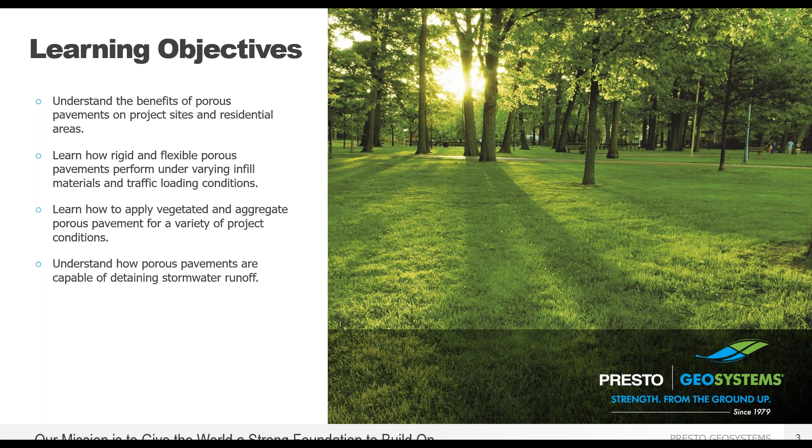First, a little background on Presto. We worked with the U.S. Army Corps of Engineers to develop geocell technology in the late 1970s and have been innovating ever since. Our products have been used in over 100 countries and in every state of the United States. But we go beyond simply providing a product to helping you provide a complete solution.

We operate in 3 product areas: soil stabilization using our GeoWeb geocells, which can be used for load support, slope and channel protection, and constructing green retaining walls; porous pavements, of which we have both vegetated and aggregate solutions; and lightweight reusable construction mats.

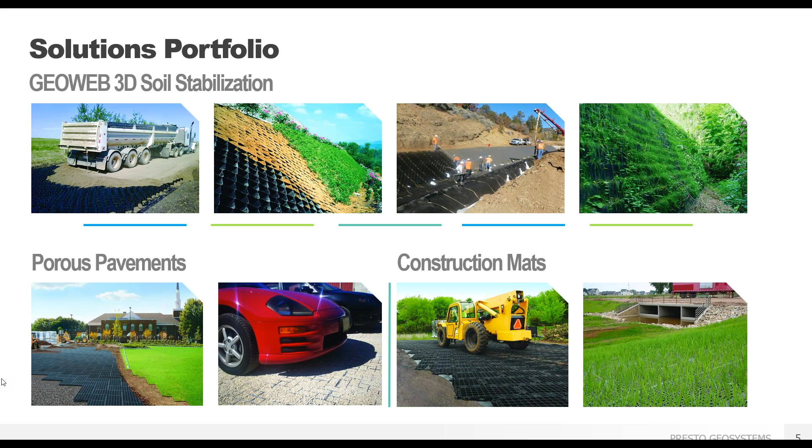Now on to our focus topic of porous pavement. A natural first question might be, why are porous pavements needed? Or how are they different than standard pavement surfaces we usually see? There are a number of great benefits to using a porous pavement for your project.

Porous pavements are a class of solutions that address, in a cost-effective way, regulations that need to be met. After more than 50 years, the Clean Water Act continues to create the need for stormwater management for both quantity and quality, as the primary federal law in the United States governing water pollution. While the Clean Water Act establishes the basic structure for regulating discharges of pollutants into the waters of the U.S. and regulating quality standards for surface waters, most states have developed non-point pollution regulations with specific targets, and some local regulations often require even more stringent standards if the project is near a protected wetland or water source.

The EU Water Framework Directive establishes protection on inland surface waters, transitional waters, coastal waters, and groundwater, and it aims to prevent and reduce pollution, promote sustainable water use, protect and improve the aquatic environment, and mitigate the effects of floods and droughts. The Canada Water Act, German Federal Water Act, Water Prevention and Control of Pollution Act in India, and similar structures throughout other countries parallel these legal frameworks. Porous pavements are one way to meet these criteria while still performing in a structurally meaningful and long-lasting way.

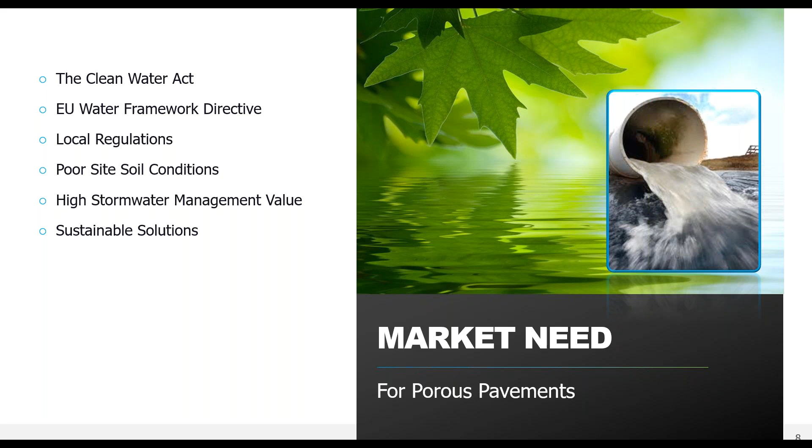So there are a couple of different porous pavement options available. We'll start by talking about some of the more traditional options. These are probably better known. The options for porous pavements include using a porous version of the traditional pavements, like concrete, asphalt, and paver blocks. These applications allow for normal traffic frequency use and have increased infiltration over their non-porous versions, which can help with stormwater requirements.

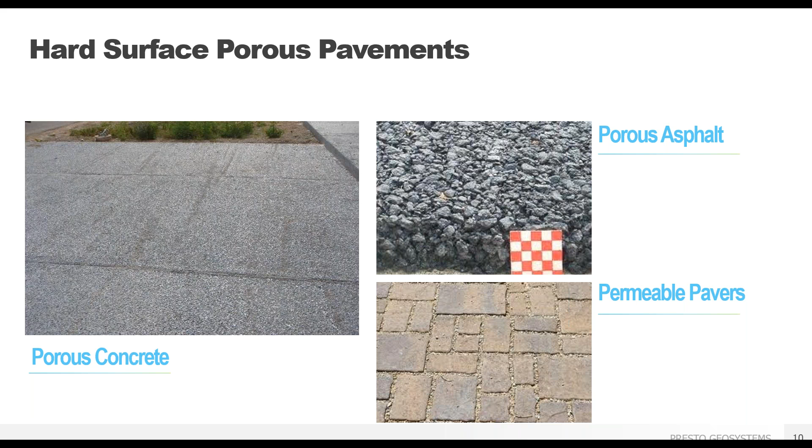Hard surface porous pavements act very similarly to their non-porous counterparts, but often suffer from durability challenges long term. The big difference between standard pavement and hard surface porous pavement is in the cross section.

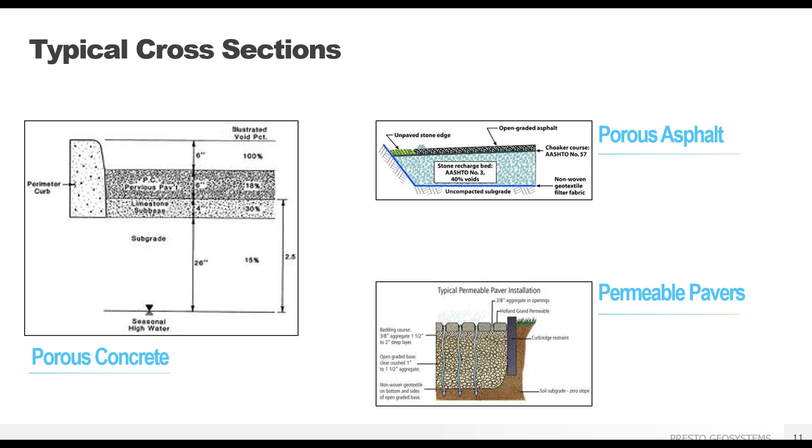All three of these methods have deeper cross sections than a standard pavement section and require a choker or bedding course between the pavement and the open graded base layer. The choker layer is intended to be both the leveling layer for the surface pavement, ensuring a smooth and proper surface, and it's intended to provide the resistance to movement or differential settlement that could damage the surface. So it has an important function, but can be costly and time-consuming to install properly.

I also have mentioned some durability challenges, as well as a few other significant drawbacks to using these traditional methods. Cost is one of the biggest factors, both during installation and over the lifetime of the project. During construction, these products need specialized materials to create the pavement and specially trained contractors that know how to properly install this type of system.

There's a lot of long-term maintenance requirements as well. Regular deep cleaning, such as vacuuming and power washing, is required to reduce clogged areas, which happens often in high traffic areas. Resurfacing or replacement of lost material due to raveling, which occurs because of weak bonds between materials, is also common.

And that choker course we just talked about, it actually impedes water flow, reducing the infiltration capacity of the system and leading to ponding at the surface. Kind of the opposite effect of what we're going for, right?

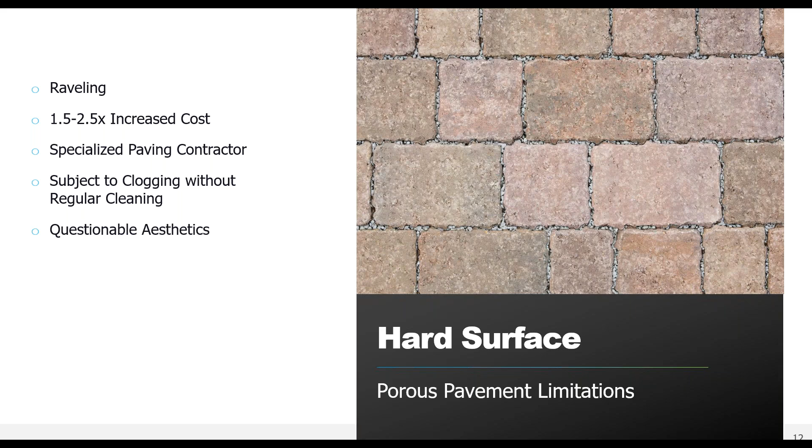So we want to find a way to fix those issues for a better way forward. Here at Presto Geosystems, we offer two different types of porous pavement systems, a flexible and a rigid option to best fit your needs. Instead of adaptations of existing pavements, our solutions are designed from the ground up to function as a porous pavement.

So we're going to start off with our rigid porous pavement systems.

There are two different surface types that can be used for our porous pavement systems: topsoil with vegetation or gravel for a stone surface. The rigid porous pavement systems work well with both options, and it's up to you to decide what you need for your site.

The biggest difference between the two, besides looks obviously, is the amount of vehicle traffic they're able to withstand. With a vegetated system, vehicle traffic should be occasional. Think only a few times a week. This is because no matter how great a system is, grass just doesn't like to be driven on. Too much time getting crushed under cars will kill your grass. The system will still protect the root zone without any issues, but you won't have the nice green lawn you might have been hoping for, as the vegetation cannot reestablish between the traffic cycles.

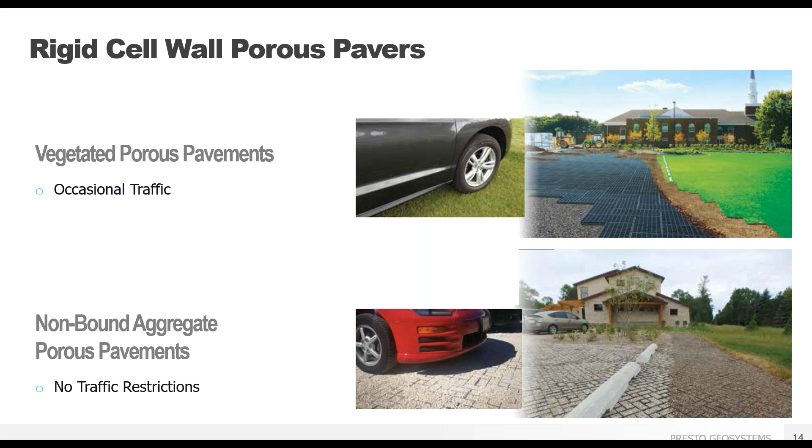There are two different paver units available depending on the infill type chosen. The first is for a vegetated system, and we call it geoblock. The geoblock system is a rigid porous paver unit, meaning that the panels are not meant to bend or twist. This rigid nature means that a thinner cross-section is possible and is a stronger system compared to systems that are made of textiles or of traditional pavement materials like concrete.

An important aspect of the geoblock units is the large amount of open space in the bottom of each cell, which allows for full root penetration so the grass surface is thick and uniform. The cells are filled with topsoil and then vegetated, so grass grows above the cell walls. So you don't see any plastic material, and the paver unit itself is protecting the root zone.

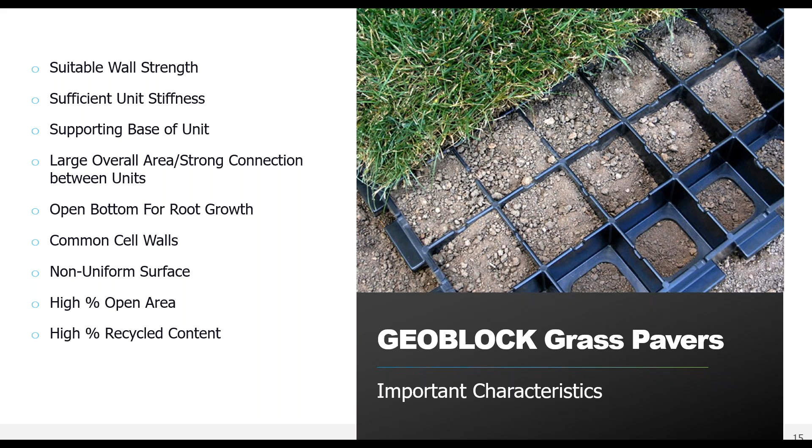We call the aggregate system GeoPave, which I know may cause confusion with the vegetated geoblock name, so I'll try to help you keep track. The GeoPave units are similar to the geoblock units with the same rigid paver characteristics, but have specific features needed for performance with aggregate infill.

The main difference to highlight is the monolithic mesh bottom. This is a molded in place mesh on the underside of the paver unit rather than the large openings we just saw. The mesh keeps the stone infill from migrating under the unit, and the integrated nature assists in the overall rigidity of the paver unit. This lattice bottom spreads the load similar to a snowshoe, so the wheel loads do not create ruts due to high volume of vehicles. These units were designed specifically to work with different types of infill material and create the best possible pavement section for your needs.

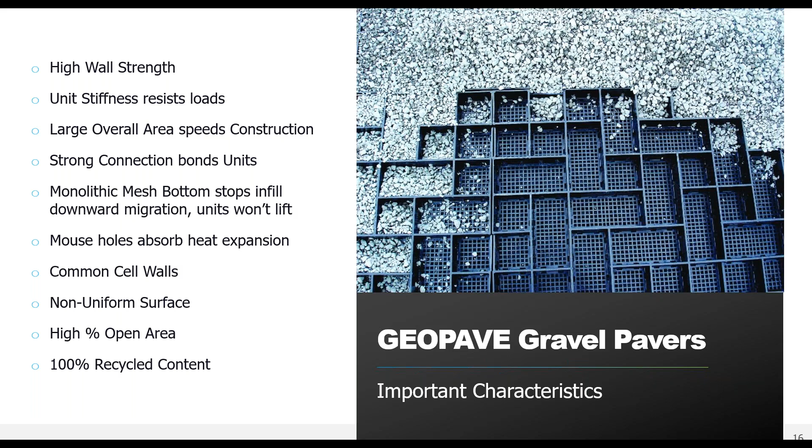We also offer a flexible porous pavement system called GeoWeb. This is a geocell, which may be a term you've heard before. Flexible porous pavement can support the same loads as the rigid paver products, but often requires a deeper cross-section to carry heavy vehicles. The flexible nature of the GeoWeb system is beneficial for areas with potential for settlement, such as wetland areas.

The GeoWeb system is similar to the rigid systems we just looked at in that it holds and confines your material in place to create a drivable surface. The difference is that with rigid systems, you're driving directly on the paver units, while with the flexible system, you're driving on the infill material.

So it's much more important to choose a high quality material when implementing a flexible system. You obviously aren't going to get ruts from the rigid paver units, but you also won't get them from the flexible system either. The GeoWeb panels create a platform for vehicles to drive on, and by holding the material in place, ruts and wheel wells won't form.

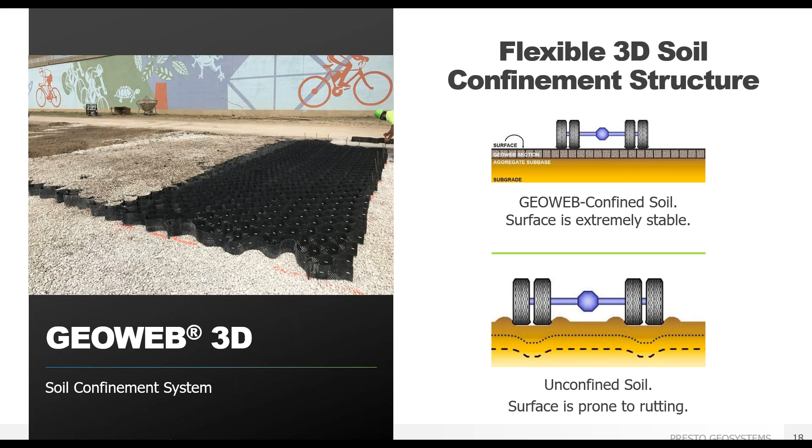The GeoWeb system is our version of GeoCell technology and consists of two main attributes. The first is the cell or container size, and the cells come in three diameters: small, medium, large, with various cell heights. These dimensions depend on your project details and vehicle loading requirements, and we can help you determine which is most appropriate for your specific job.

There are also 5 different section lengths to best fit your project needs. The ultrasonically welded seam, where all the connecting points are, is important to the function of a geocell, and the stronger your seam strength, the better the performance of the geocell will be. These strong seams allow for heavier infill material, steeper or taller slopes if needed, and better lifetime performance.

GeoWeb is produced using high-quality virgin high-density polyethylene resin for consistently strong welds, while also maintaining semi-rigid ductile properties, high stress crack resistance, and overall toughness and long-term durability in the environment.

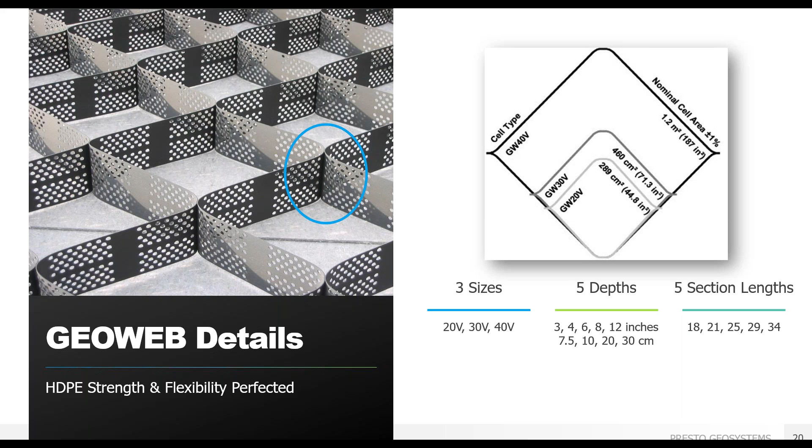The second main attribute of the GeoWeb system is the infill, or what you put into the container. The flexible GeoWeb system offers the choice between a vegetated surface and a stone surface. You can also have concrete as your infill material, but then you have an impervious surface, and that's not why we're here today. If you're curious about this choice, feel free to reach out to us and we'll be happy to help.

An important benefit of the system is that even a low quality aggregate, sand, or certain salvage material can be used to infill the cells. Using that salvaged aggregate or sand can save significant amounts of money on material and hauling costs.

We can also eliminate fines when desired, since the cells provide the confinement and aid compaction of cohesionless soils. So without the fines, you can significantly improve drainage and let water flow freely through the system, preventing pore pressure buildup and global failure of your cross section. This can also be considered a truly porous pavement.

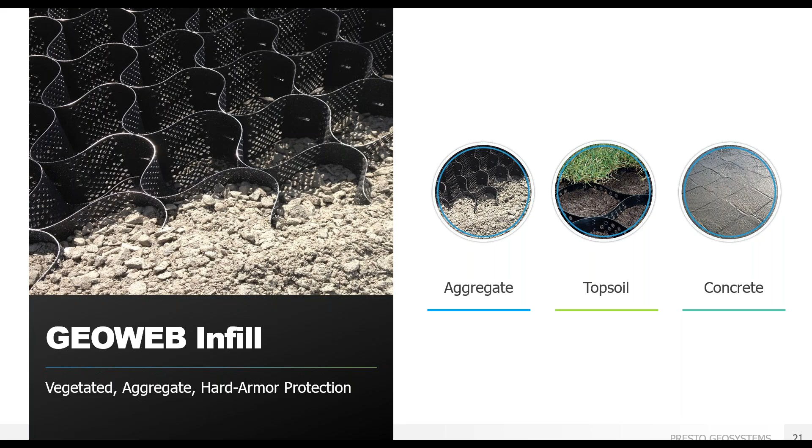So the three primary elements of any geocell system, cell walls, internal junctions, and connectors, must perform uniformly as a complete system.

GeoWeb is manufactured using a proprietary blend and will retain its durability for greater than 100 years, with lab testing indicating 149 years without degradation, even at full exposure to the elements. We stand behind these numbers so you can deliver certainty in the solution and build with quality materials you can trust.

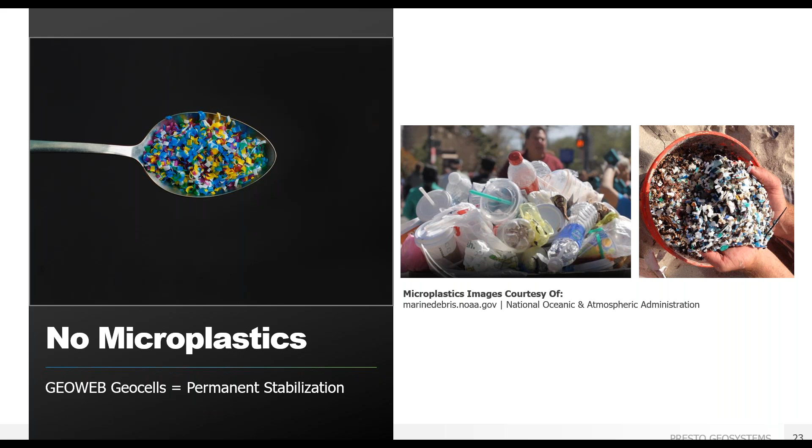GeoWeb is made from high stability inert materials and is your permanent stabilization solution. It will not degrade, leach, or release microplastics into the environment. GeoWeb is manufactured with premium high-density polyethylene resin with no fillers, polymer alloys, or compatibilizers. And our base resin is the same material used in environmental applications like geomembranes and other environmental barriers to protect against the spread of harmful toxins.

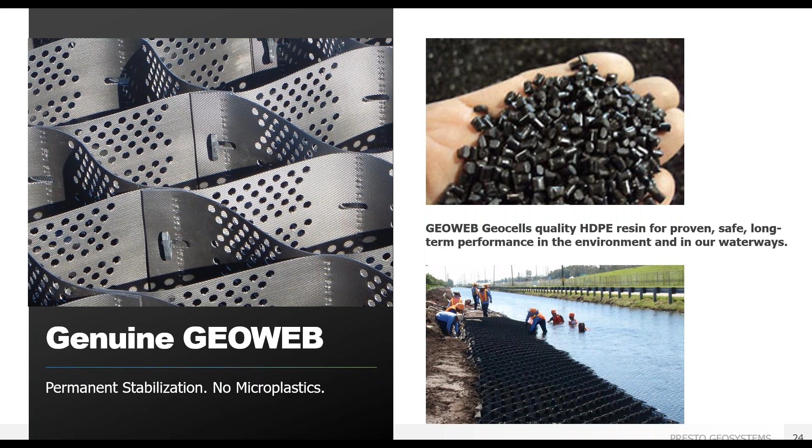Our products have been third-party tested by accredited geosynthetics labs, confirming long-term stability against environmental factors such as weathering and oxidation. GeoWeb and our accessories are 100% made in the USA under strict quality assurance and environmental control processes.

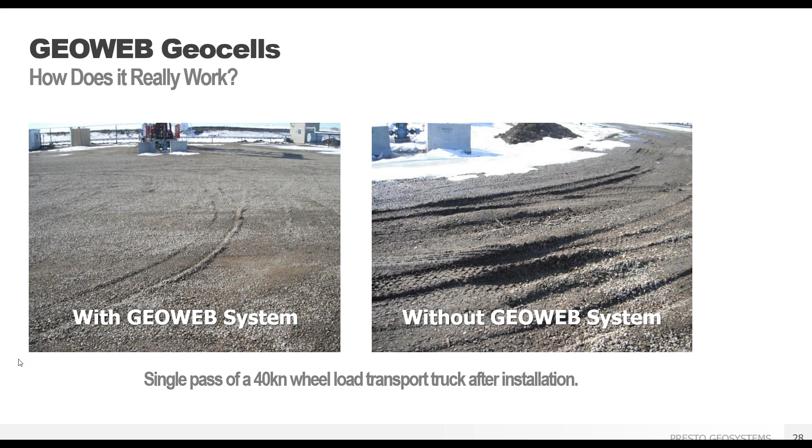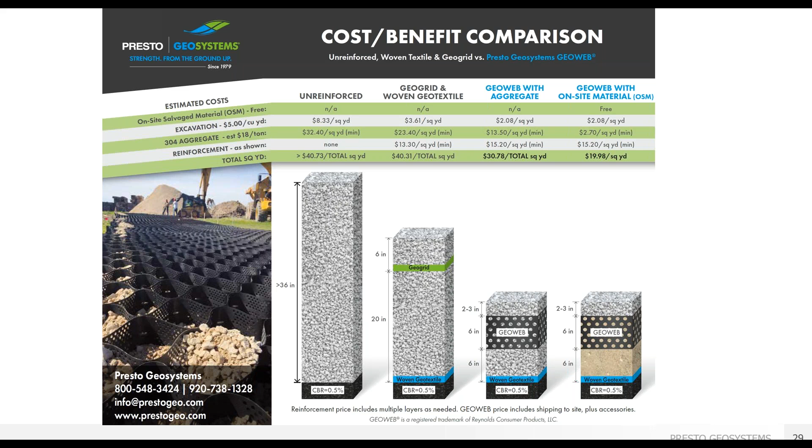So we've talked about the characteristics that make rigid and flexible porous pavement units special. With these in mind, we can now talk about the benefits of choosing porous pavements over hard surface pavements.

All of the products offer significant storage of stormwater in the cross-section as it moves into the groundwater system. Because the water infiltrates through the system, there is minimal sheet runoff at the surface, reducing flooding potential on or around the pavement.

The vegetated surface pavements, like the GeoBlock system, help keep the topsoil loose and protected from compaction, allowing water to infiltrate faster than any typical vegetated area on site.

Other paver systems that are geotextile fabric based percolate much more slowly and usually leave water ponding at the surface, which defeats the purpose of a porous pavement.

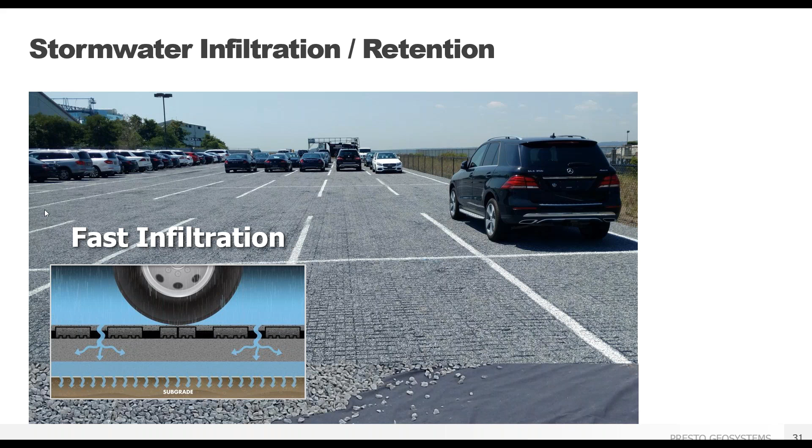Pavements that allow water to flow through the surface into a base of open-graded base course can reduce the requirements for stormwater storage at the surface. The rate of infiltration of both the porous pavement material and the subgrade soils, along with the porosity of the base material used, determines how much surface storage is required.

It's possible to reduce or even eliminate the need for above-ground storage if you can store that stormwater underground.

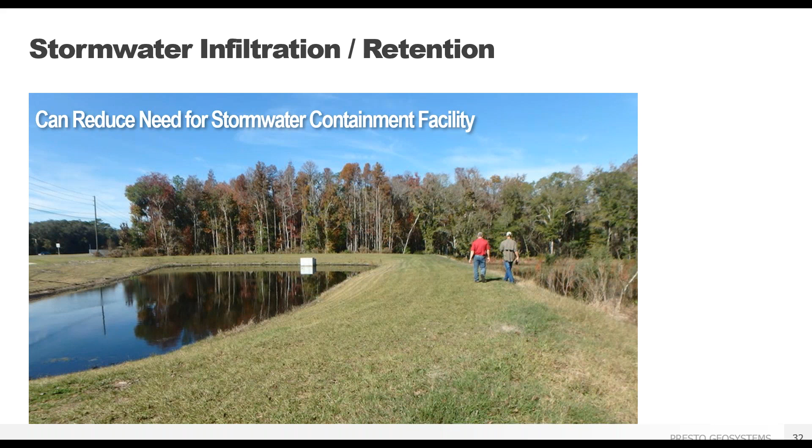If your native subgrade has poor infiltration, or if you're required to direct the water to a central location, collection pipes can be installed in the open-graded or engineered fill base course.

The pipes can have perforations to collect water and can be sloped to maintain velocity without affecting the surface grade. Providing a wrapped perforated pipe is typically not recommended unless the base is clean. It may be better to provide a geotextile filter around the perimeter of a drainage trench with the pipe encapsulated with stone.

The main thought is to prevent clogging, and the method used on a specific design will be based on base material and your anticipated use.

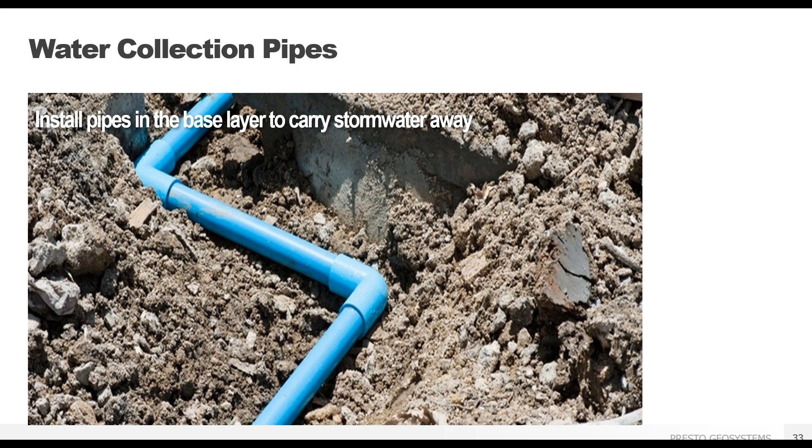Our vegetated GeoBlock and aggregate GeoPave pavers have a high crush strength because of their rigid and shared wall connections.

Pavers with enough strength allow for less base requirements to support loads, reducing the potential cross sections by up to 67%. The surface of the porous pavement resists concentrated rutting as the load is dispersed across the rigid pavement, so no wheel ruts or sunken drive lanes are going to form and cause failure points.

The units are strong enough to drive on unfilled, which makes installation both faster and easier. If a thinner cross section is important, these products would be the way to go.

Fabric-based systems obviously have no internal strength and easily warp under vehicle loading.

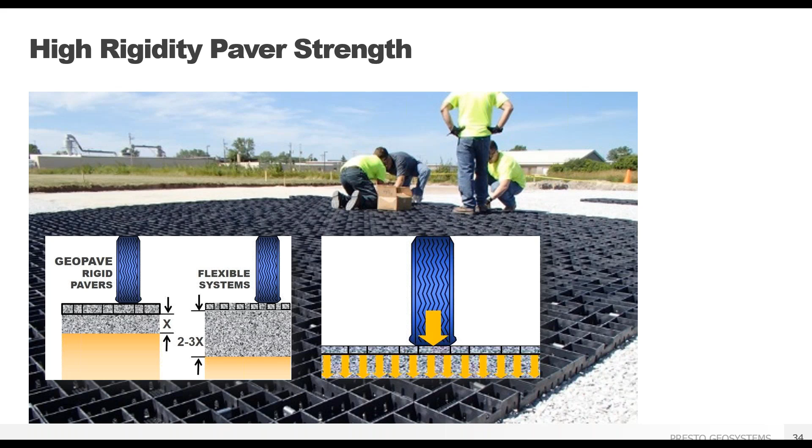One of the functions of a porous pavement system is to reduce the stress that's transferred to the soil by vehicle traffic. So a great application of these products is to use them as tree root protection, like this hotel did in southern Illinois. By laying these systems over buried tree roots as close to the tree trunks as possible, you reduce the stress that puts pressure on those roots, potentially damaging them and killing the tree.

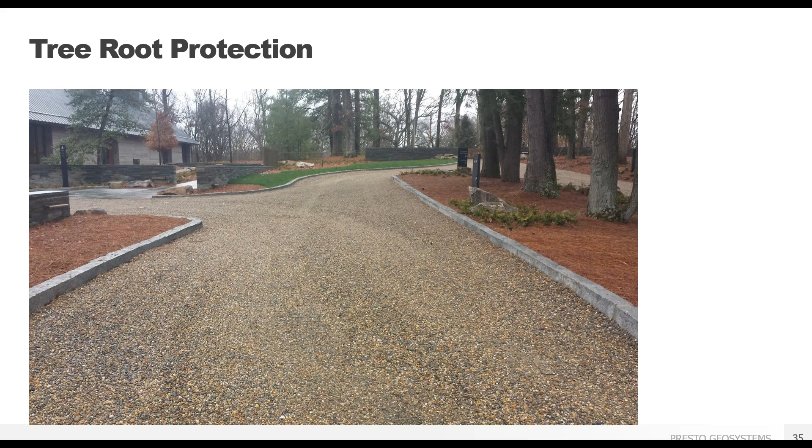The shared wall system and strong connections create a framework that's highly resistant to movement or breakage from vehicle turning stresses and torsional loads. So the rigid GeoPave and GeoBlock systems are not just straight drive lanes, they are full service vehicle areas, allowing for starting, stopping, turning, and everything in between. The panels are not going to be damaged from any normal vehicle activities, even from the heaviest trucks or semis.

The flexible GeoWeb system holds the infill material in place so that twisting movements from tires won't displace the material, and everything stays where it's supposed to.

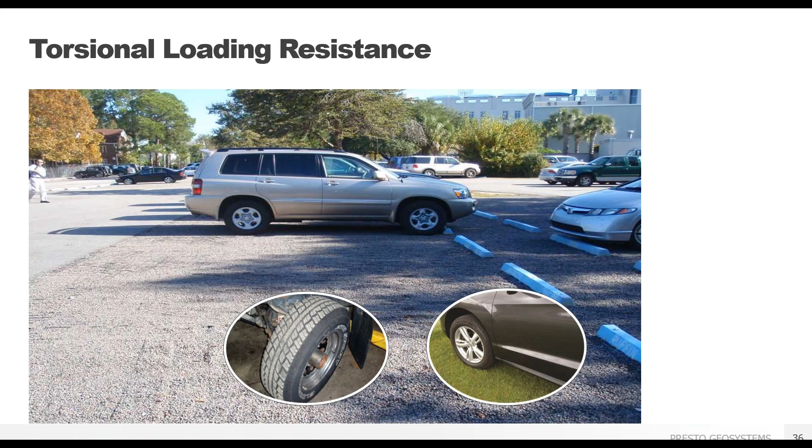Aggregate GeoPave and vegetated GeoBlock units, or the flexible GeoWeb panels working in concert with hard surface pavement, are so porous that they can handle sheet runoff from adjacent impervious parking areas. This is a great way to add additional parking spaces while still meeting stormwater requirements on site, with no need to create more stormwater infrastructure such as drainage, swales, or ponds.

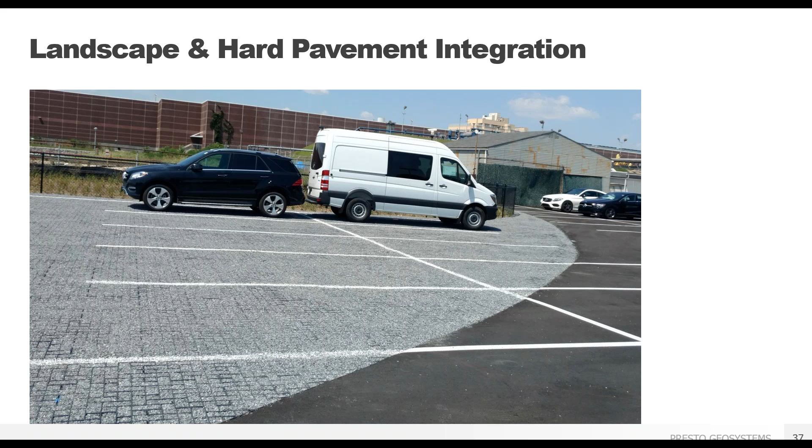The cell walls of the GeoPave unit are meant to be visible and were designed with a herringbone pattern similar to a paver stone aesthetic. Additionally, the infill stone color can be varied to create the sense of separation useful for walkways, parking lots, or road shoulders. The GeoBlock units allow for full vegetation growth with a more natural look, so the cell walls are not visible through the grass.

GeoWeb panels are completely covered so that no plastic material is seen, just your infill material. So whatever look you're going for on your site, you can achieve with these products without the unfinished look common to porous concrete or porous asphalt.

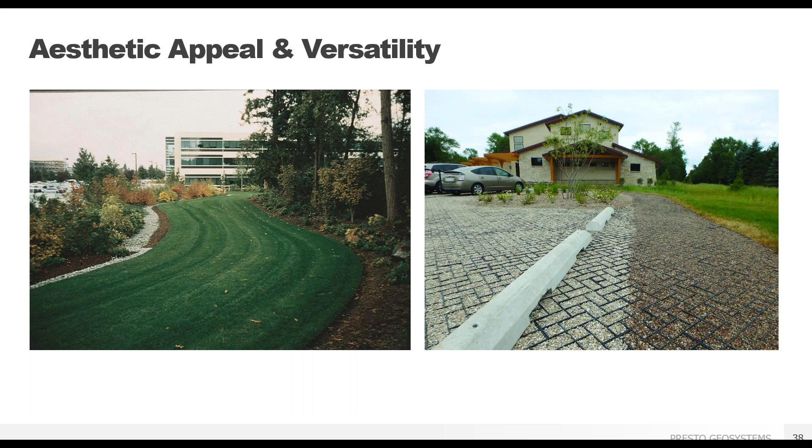Reducing a site's overall environmental impact can help meet green infrastructure, low impact development, or green building goals for building in protected or densely populated areas. It can also help you meet stormwater requirements that limit the amount of hard surface in your landscape plans, which is becoming an increasingly common requirement from cities and townships. This is something we experience all across the US and are absolutely willing to help you achieve for your specific projects.

Paving crews and specialized paving equipment are not necessary, and oftentimes landscape crews are all that's required. So you can save on equipment and labor costs and get these systems in the ground quickly without waiting for cure times or sequence construction limits.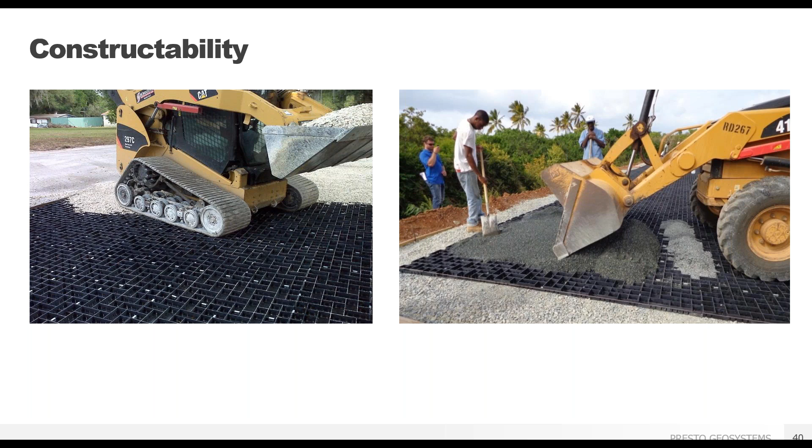All of our porous pavement systems are low maintenance, no need for vacuuming or unclogging, and no need to constantly be replacing the stone surface. By having the paver units or GeoWeb panels locked together and using basic anchoring methods, you can just place it and forget it.

Customizing your system also helps with maintenance when you keep people driving where they're supposed to be driving. Bright yellow and blue delineators are available for parking lanes or other marking, so you can make the space work for your needs. Other common extras such as parking stops are also easy to install in any of our porous pavement systems, like this porous parking lot in Nashville, Tennessee.

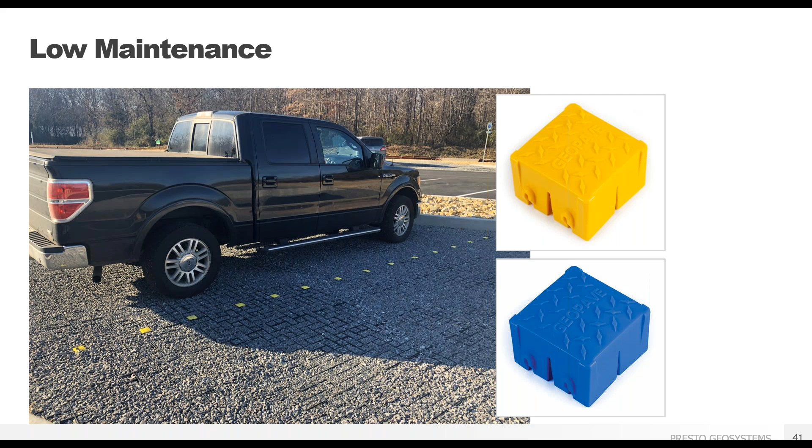All three options, both rigid and flexible, are capable of supporting very heavy vehicle loads, including emergency access vehicles like fully loaded fire trucks. So they work well as emergency access lanes, like at Newman University in Wichita, Kansas. The center median between existing sidewalks was reinforced with the GeoBlock vegetated system to be able to allow vehicle access as needed and otherwise look like a regular lawn people can walk on. Being able to use these systems even in these critical areas that need extra reinforcement really shows how useful porous pavement systems can be.

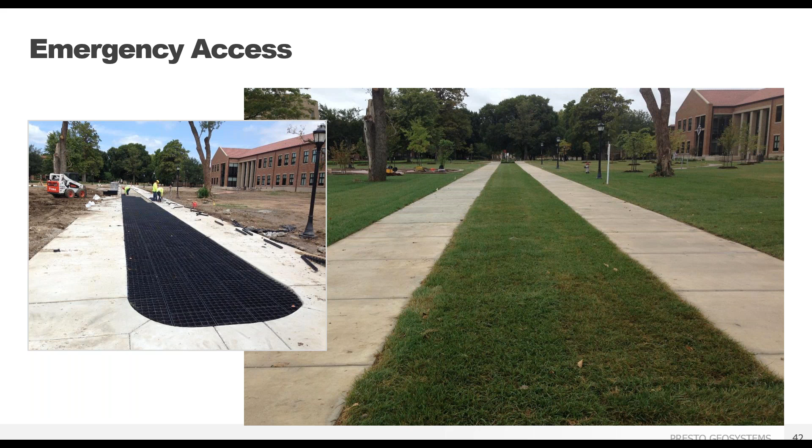Presto Geosystems has created a free, easy-to-use tool to determine the right porous pavement system for your specific project and site conditions. A cross-section of the system is created based on the inputs and system requirements. And there's a way to determine exactly how deep the base course needs to be for a certain amount of stormwater storage. The tool is available on our website, prestogeo.com, and our engineering team is always happy to give advice or expertise on designing a porous pavement system for your site's particular requirements.

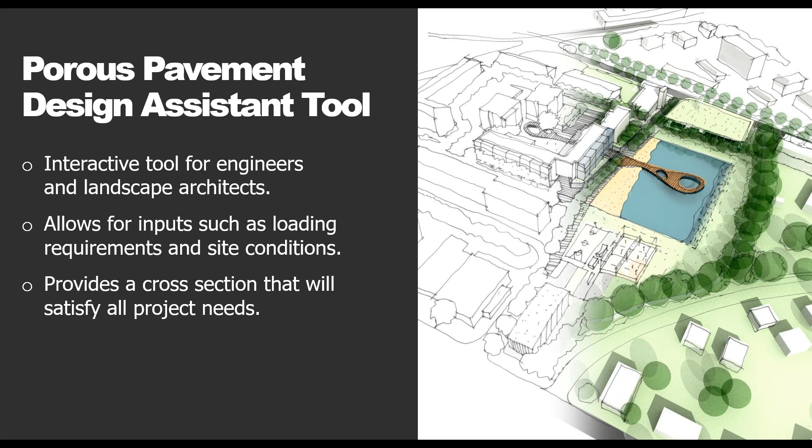This is a quick look at what the Design Assistant tool provides you. It's a very basic cross-section, but can be very helpful during the beginning of the design process. If needed, there are additional calculations and CAD details that our engineering team can provide. But this is a good first step when talking to regulators or to show that there's stormwater storage with this type of system. It works with all of our porous pavement products and is an easy tool to help determine which may be most appropriate for your site needs.

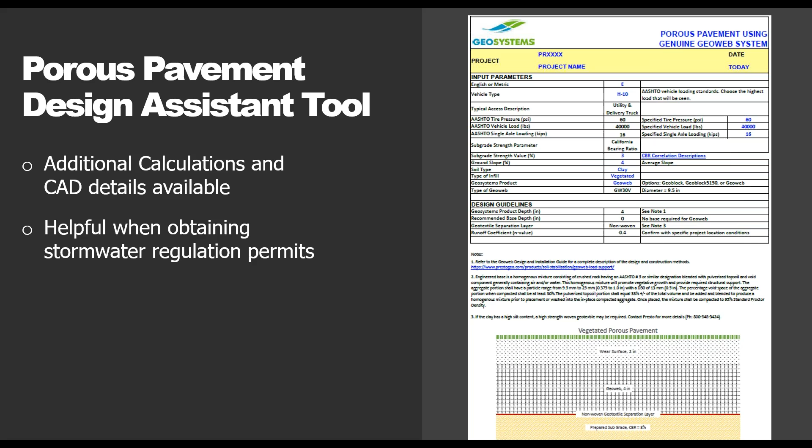Let's move on to some case studies showing how these systems work in the real world. Let's start with the flexible GeoWeb system. Here we have a few photos of the walking trail built through Nahant Marsh in Iowa. The community came together to install this walking trail through a marshy area, doing everything themselves, which shows how easy it is to install the system, even when you're not a specialty contractor.

Because this was in a marshy area, not interrupting water flow was critical. Rainwater can easily flow vertically through the system, but marshy wetlands water can also flow horizontally through the panels because of all the perforations within the system. So water flow is not interrupted in any direction.

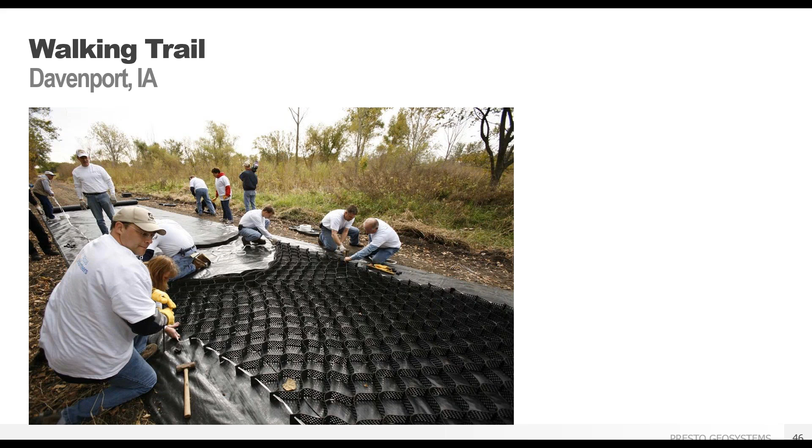The GeoWeb panels were filled with stone to allow water to flow through and into the marsh without creating areas of runoff or non-infiltration like an asphalt road would have. This way, the impact of the trail on the natural environment is minimized and people still get a clean, stable area to use for recreation.

You can't drive on the unfilled panels without damaging them, but you can get right on there once the stone is in place, even if you haven't filled the whole area yet. That can be very helpful during construction.

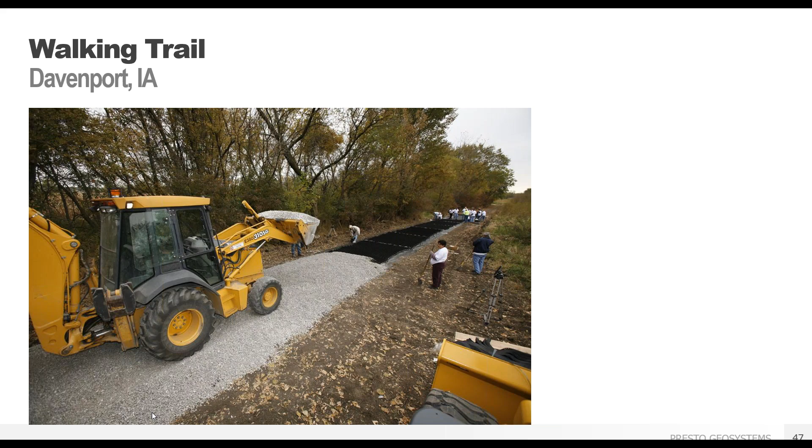It's easy to use either machinery or manual labor to fill the GeoWeb cells, and it'll be the same with the GeoPave and GeoBlock rigid porous pavement systems, as we'll see in a bit. The overall depth of the cross-section is pretty variable with the GeoWeb system, since the panels come in a few different depths and a base layer may be required if expected loading is large. The GeoWeb system usually requires the most excavation of any of our products, so that's something to keep in mind when thinking about which one might be right for your site's needs.

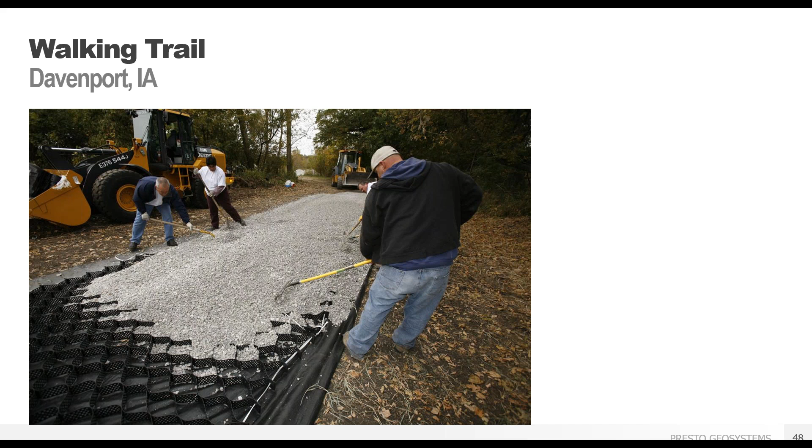Let's take a closer look at the aggregate GeoPave porous pavement system next. Here we have a typical cross-section of the GeoPave system. The GeoPave is a fixed 2-inch depth, so the depth of the overall system depends more on the amount of open graded base course required. There are a variety of factors that decide the depth of your base course, but usually there's a 2-inch minimum required for most scenarios.

Additionally, depending on the native subgrade soil, a geotextile separation layer may be required. Note there is no need for a choker or bedding course beneath the GeoPave unit, so there's not going to be any layer that limits the stormwater infiltration of the system. Your infiltration rate depends on the aggregate infill chosen.

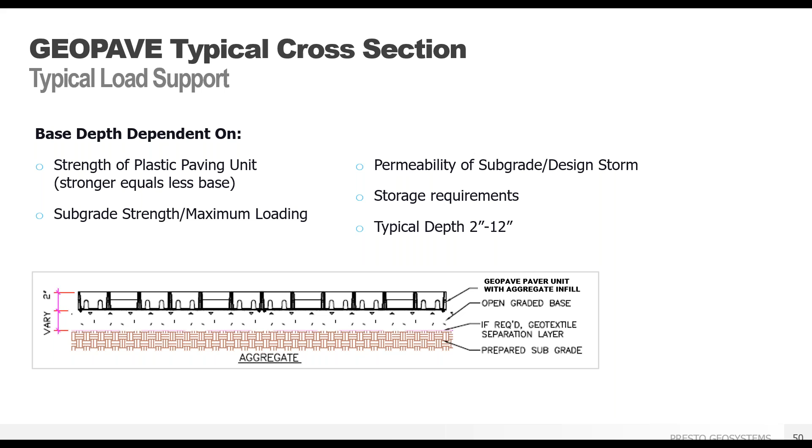The biggest factor in determining base depth is the strength of the soil, expressed as the California bearing ratio, or CBR, of the soil. The higher the ratio, the stronger the soil. The strength of the GeoPave system is enough that even for the highest load rating from AASHTO H25 loading, which is heavy fire trucks, there is a low base depth requirement, only 6 inches, compared to up to 14 inches with geotextile-based systems.

It's important to note that the table shows minimum depth requirements, and the depth of the base can be increased when additional stormwater storage is required. So if you want to use the GeoPave porous pavement system for on-site stormwater detention, for example, you would add to the base layer.

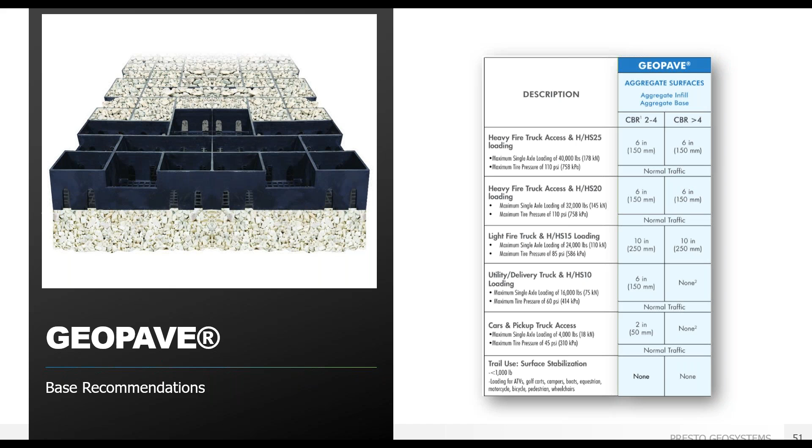There are a wide variety of uses for the GeoPave system, including fire and utility lanes, site access roads, road shoulders for runoff reduction, trails and walkways that allow for ADA compliant design, and much more.

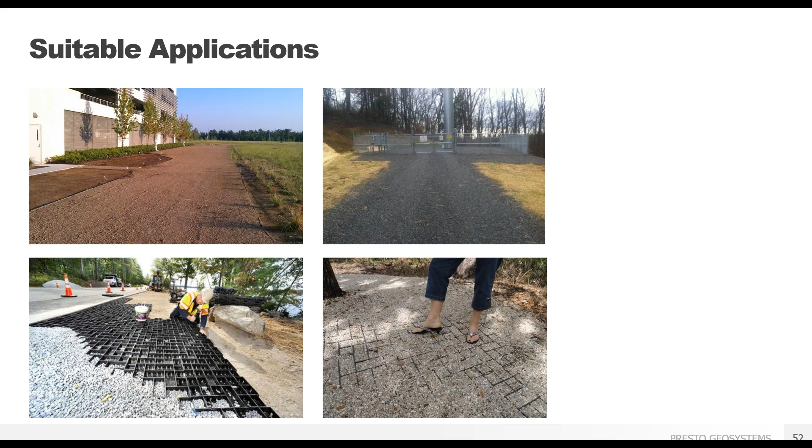Unlike the GeoPave units, which are rigid, geotextile paver systems, or rolled systems because they come rolled like a fabric, can have some problems due to not having common cell walls, or by allowing the stone infill to get under the system, causing uplift. Both of these issues are addressed in the design of the GeoPave system with its rigid cell walls and integrated mesh bottom that we discussed. So just be aware that because a system says it allows stormwater infiltration, does not mean it's going to work well or be appropriate for your project needs.

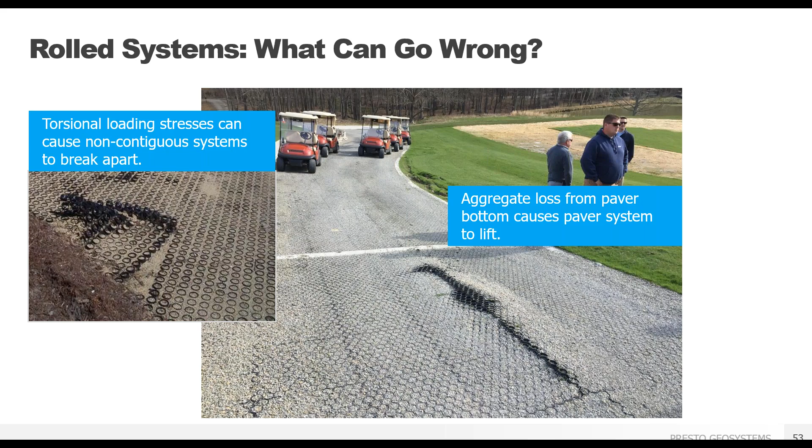So on to another case study, shall we?

Una Antioch Pike in Tennessee, a cell tower area was located on a slight hill so stormwater would run off. This project, originally from 2013, required a porous pavement system to manage stormwater on site and help reduce runoff. The project owners also wanted to keep the maintenance requirements low. The construction area was limited, and there was no space for stormwater detention ponds to be built.

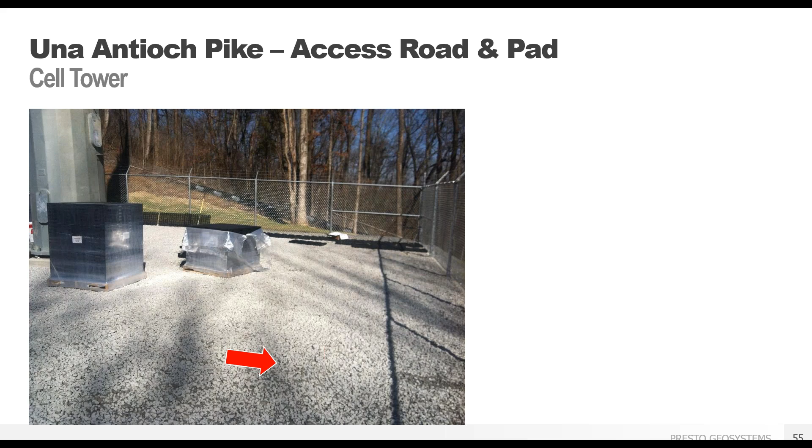Because this project was primarily about stormwater retention, the open graded base course was quite deep, 9 inches of stone, to be able to hold up to 3 inches of water during storm events. Standard lightweight construction equipment was used, no need for specialty equipment, and the crew, which had no prior experience installing GeoPave units, was able to achieve an installation rate of 1,200 square feet a day, including the excavation.

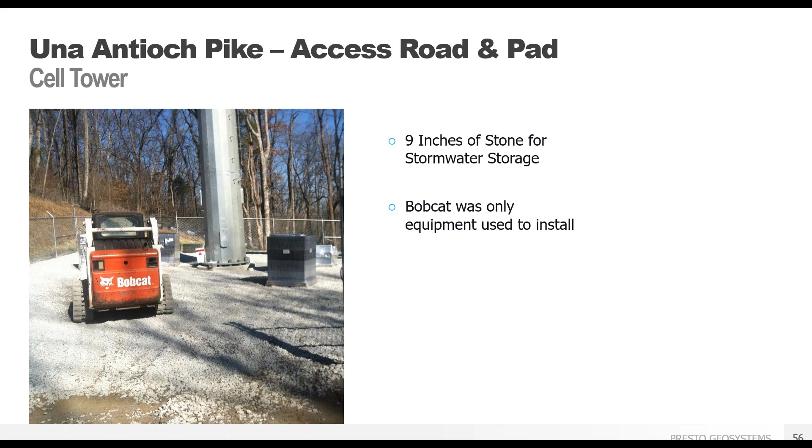The U-clip connectors are easy to install, and it's apparent here where they need to be placed. Some of the cell walls are half height, and those half height walls line up between paver units, so contractors know exactly where the clips are needed. The clips can be installed by a single worker without needing any electrical equipment. Then a small excavator or front end loader is a great option for placing the stone infill.

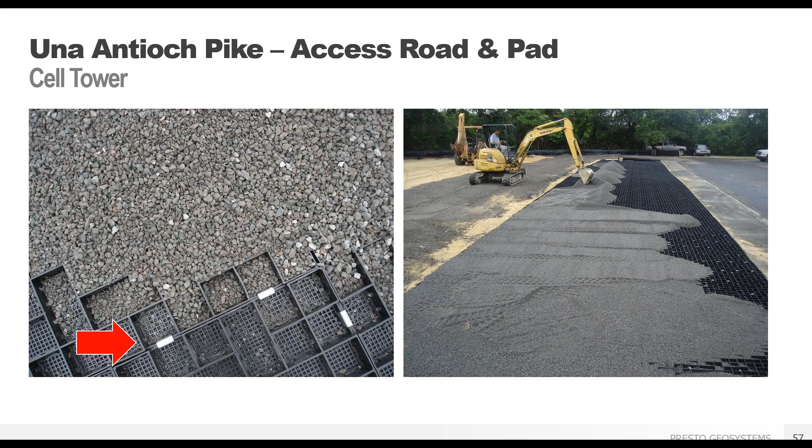And here the cell tower pad after construction. Because of the stormwater retention at its base, no additional detention pond was required, which is great for areas without that space to spare. If an above ground detention pond had been installed, there would have been a significant amount of excavation required, so this was also a great compromise between function and environmental concerns.

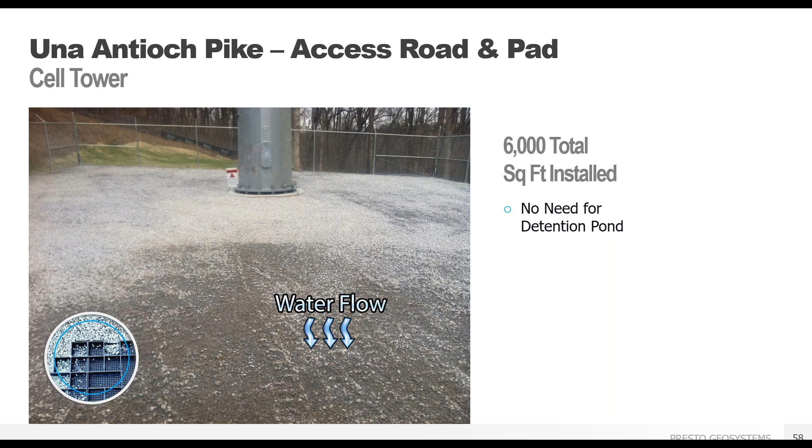And here's the access road and pad about a year after installation, still looking good, performing well, with little maintenance required. Now, years later, still in function and still holding up well. Again, minimum to no maintenance long term.

Some recommended tips for keeping the GeoPave pavement in good shape include keeping the lot clear of organics, such as fallen leaves, by raking or leaf blowing, and making sure snowplow blades are kept about an inch above the GeoPave units.

I know placing porous pavements in cold weather or snowy conditions is a concern for many regulators, so we have quite a bit of information available on our website answering a lot of the common questions we see, or you can contact us directly and we'd be more than happy to help alleviate your concerns. We are based in Wisconsin, so used to that freeze-thaw cycle and cold weather.

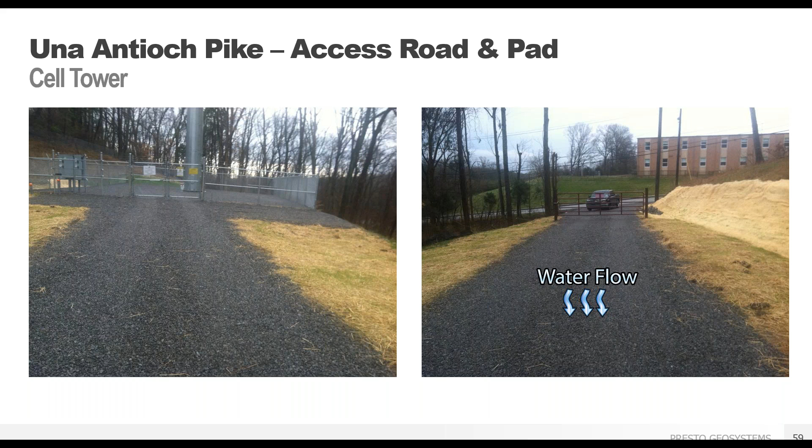We'll now focus on the GeoBlock porous pavement system.

Here we have a typical cross-section of the GeoBlock system, and the GeoBlock comes in two depths, 1.2 and 2 inches. The depth of the overall system also depends on the amount of base course required. Topsoil or sod is placed in the cells, and the roots reach down into the base. The base course is a unique mix of topsoil and open graded aggregate, which allows enough topsoil to promote the root growth with the aggregate supporting your loading. We call this engineered base.

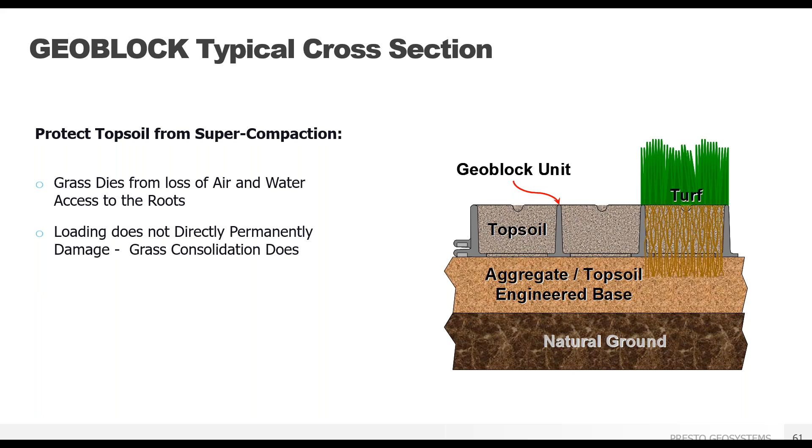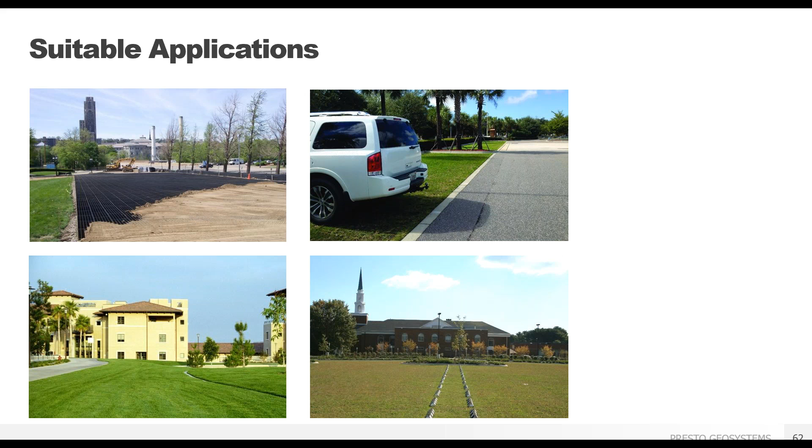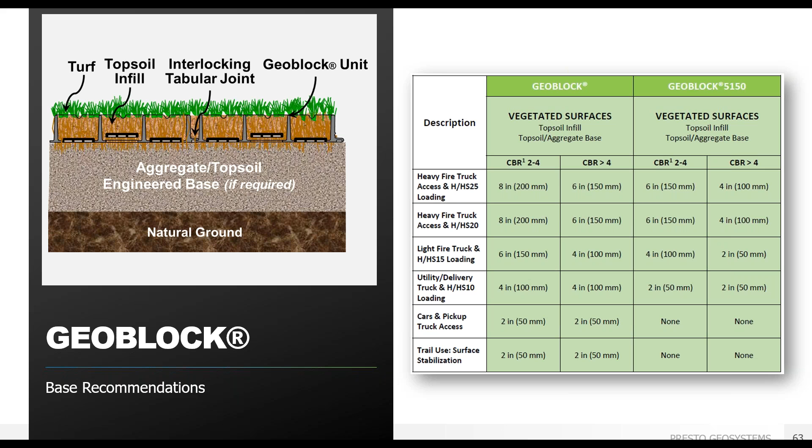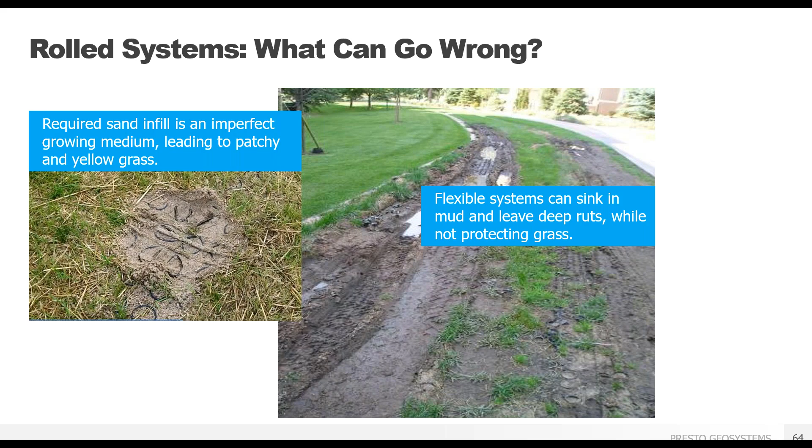And we have some case studies for GeoBlock as well.

This house was experiencing septic issues, and the yard needed to be replaced to fix things. The owner wanted to create additional parking spaces for guests as well, but had run out of room for a traditional driveway. So they decided to use the GeoBlock system and kill two birds with that one stone.

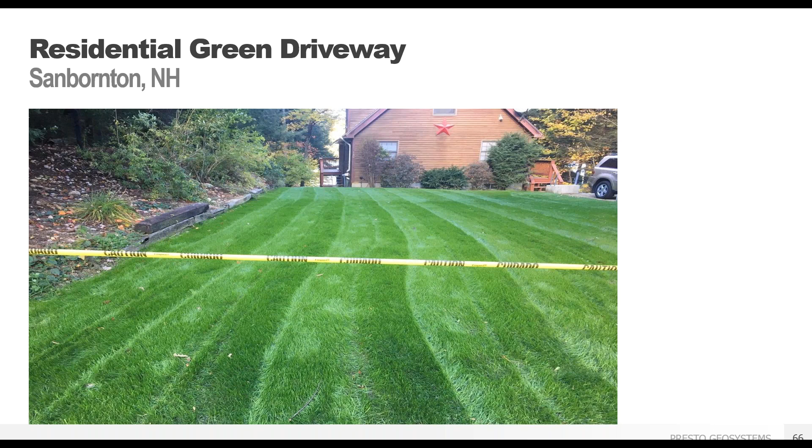The homeowner decided to do all of the installation work themselves, which is absolutely possible with our rigid systems. Installation is a simple, straightforward process.

The GeoBlock panels were laid directly on the cleared subgrade. No base layer was required because the expected vehicle loading was quite low, just passenger cars or pickup trucks. The GeoBlock panels were then filled in with the excavated soil, saving on material costs, and ensuring that grass would be able to grow in that area. The panels were laid in a herringbone pattern, which is recommended when there's going to be multi-directional traffic or lots of turning and movement, as is common in parking areas.

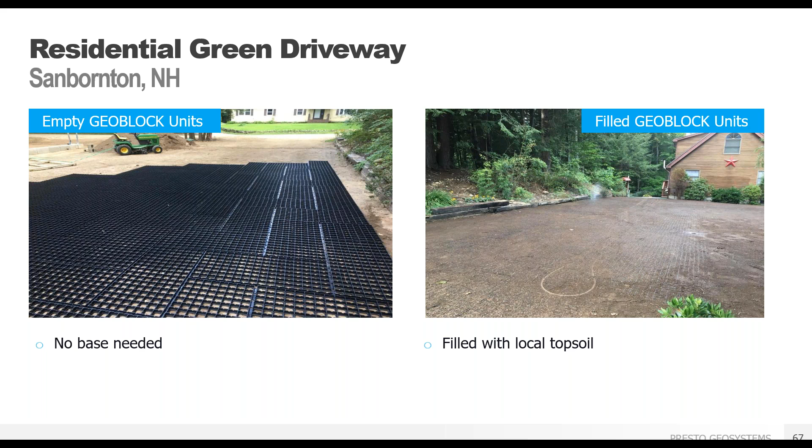Then the whole area was hydroseeded, which provides complete coverage of the area with seeds and nutrient-rich food to help healthy grass grow. You can also pre-mix seeds into the topsoil before placing in the panels for a simpler installation. The type of grass chosen isn't important to the function of the GeoBlock system, so feel free to choose whatever will work best with your local climate and give you the look you're going for.

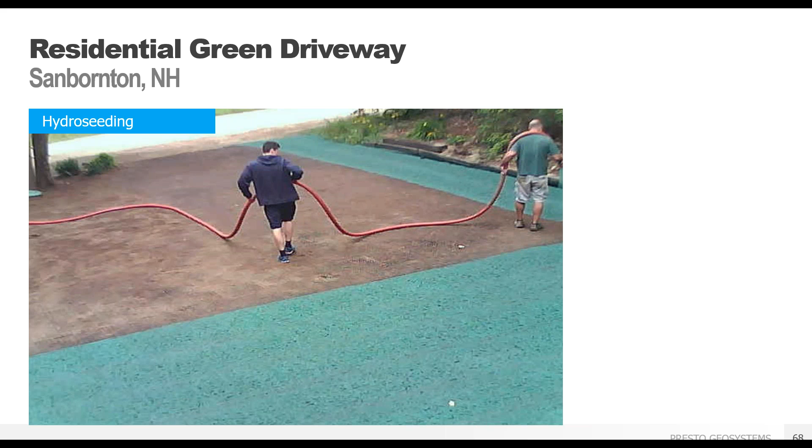A few weeks after completion, the grass is fully grown in and completely camouflaging the geoblock panels. The area still functions as a septic field because the geoblock panels help minimize vehicle loads in the area and tires are not tearing up a potentially saturated surface. You would normally never want to allow parking on septic fields, so this is a great way to add more space without compromising on function.

Maintenance of the grass pavement is similar to maintaining any grass surface. Your standard lawnmower will do the trick.

The Potawatomi were constructing a powwow area and were looking to create an area for parking trailers nearby. The ground was very soft clay that often caused heavy trailers to get caught and bogged down. Because this is in a wilderness area, the tribe was looking for a more natural look than an asphalt parking lot.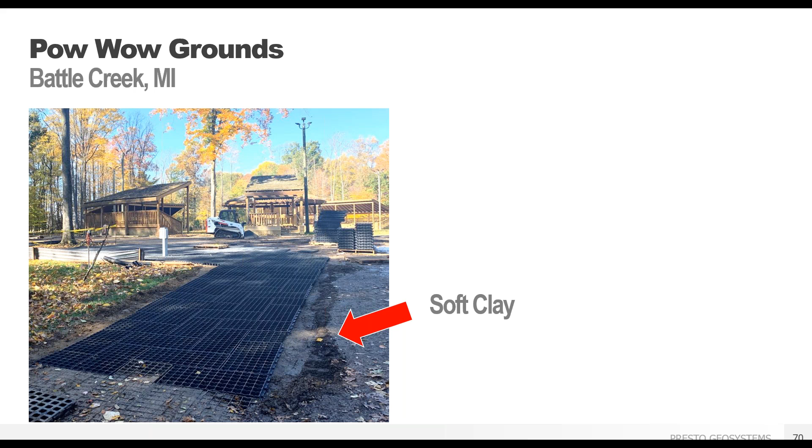The system was installed in October of 2019 so that everything was in before the snows came. Ground was leveled off and the GeoBlock 5150 panels were placed, again laid in a herringbone pattern, which is recommended when there's going to be bi-directional traffic or lots of turning and movement, as is common in trailer parking areas. The engineered base was 2 inches, which satisfied the requirements based on the expected vehicle loading.

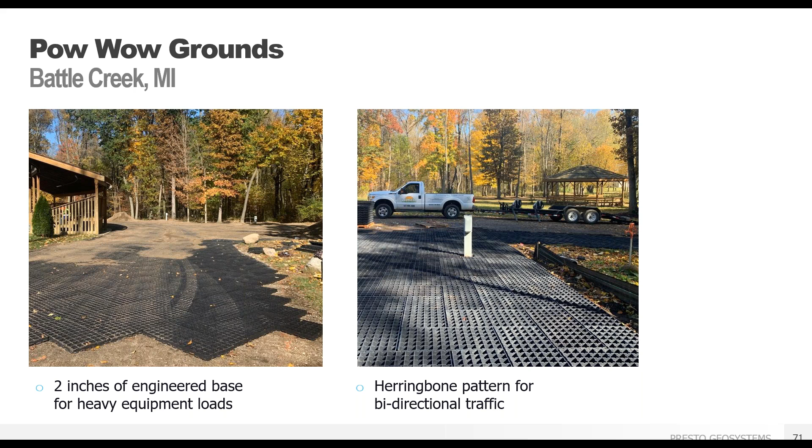The cells were then filled with local topsoil, and this was the final look at the end of installation. All the panels filled with nutrient-rich topsoil, which will allow for full grass growth come spring. The panels are visible now, but will be completely covered once grass is in there. In the meantime, during the winter months, the system can be driven on and used as needed. Once full grass growth is there, the lawn can be maintained with standard lawnmowers or landscaping maintenance.

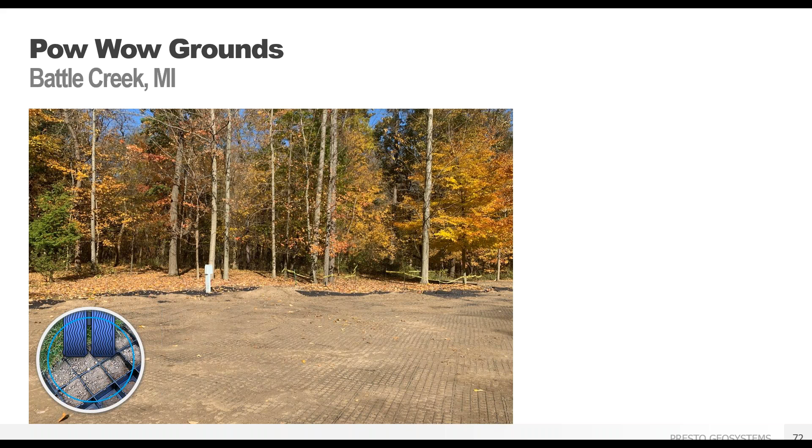So in summary, today we've covered the GeoPave and GeoBlock rigid porous pavement systems and the flexible GeoWeb GeoCell system, and detailed the many advantages they have over traditional hard surface pavements. Benefits such as stormwater management, high vehicle load capacities, and aesthetic aggregate or vegetated infill are some of the great aspects of using porous pavements.